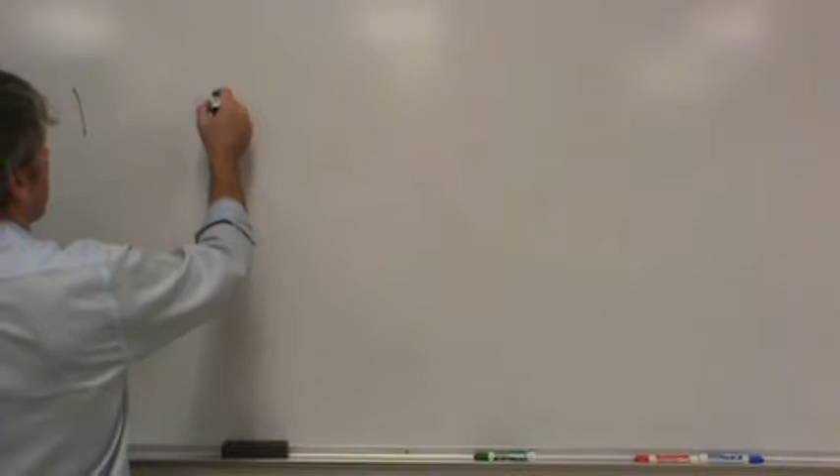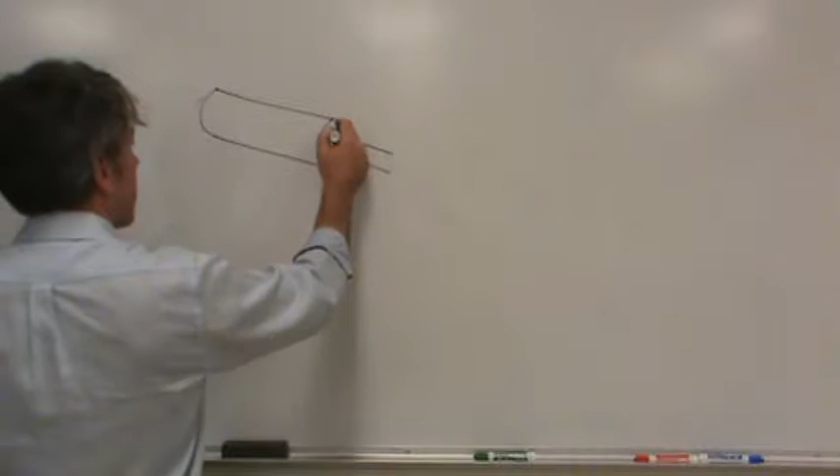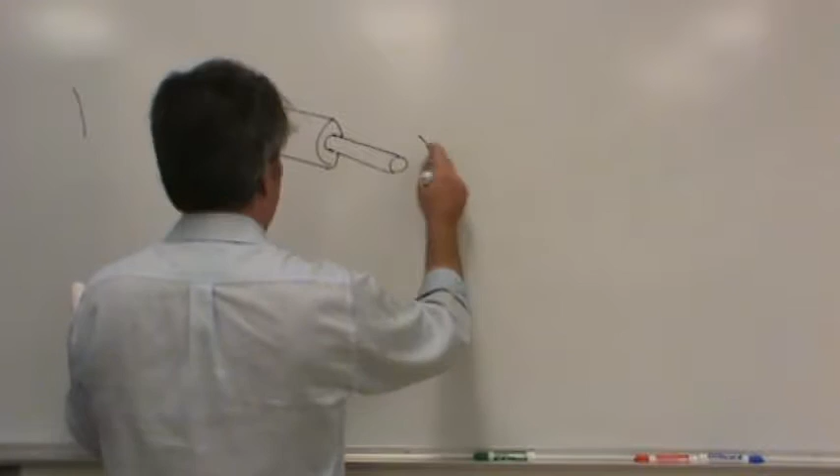Okay, so we have a bar that has a varying size. It's got a larger size on one end and a smaller size continuing. My drawing's not good, but you can see it in your book. Basically, there's a torque on the end. I'm not going to draw the disc on the end. In fact, I'm going to use a different terminology so you guys get used to it.

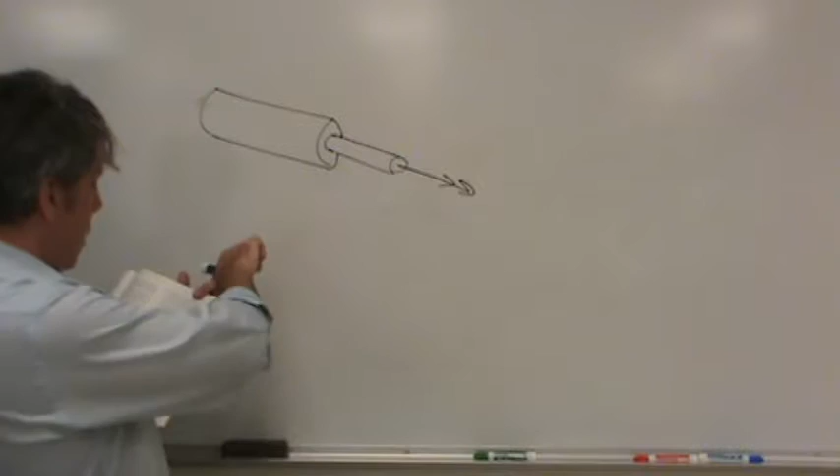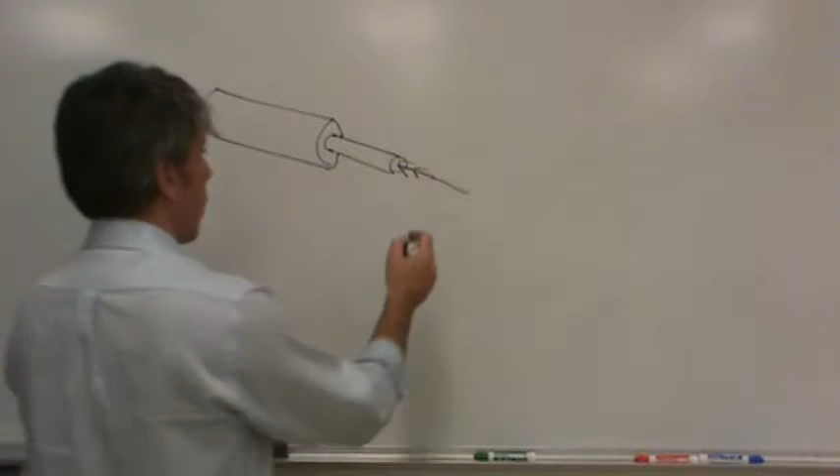So there's the torque. Have I drawn that torque in the right direction? Is it correct according to what the book has? No, because the torque in the book is this way, so I need to reverse my arrow. Doesn't really matter as far as the stress is concerned, but for consistency, I'll draw it the right way. So this torque is a 200 Newton meter torque.

And by the way, for the sake of the video, this is 4-27. So the back end of this is fixed. I won't draw the wall, I'll just put some crosshatch there to indicate that it's fixed. You got the dimensions there.

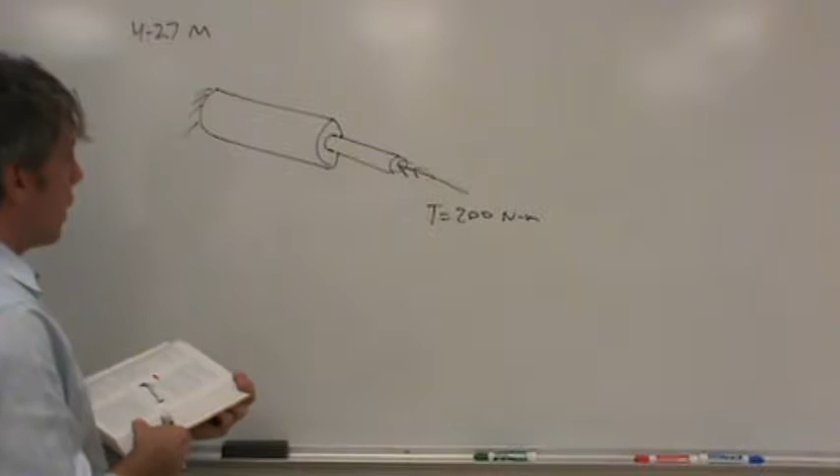Now let's think intuitively about what's going to happen here. Forget this small section for just a minute. Well, actually, let's consider the whole thing. If you were to cut the beam or the shaft here, how much torque does this section have to apply to this section to keep it from rotating?

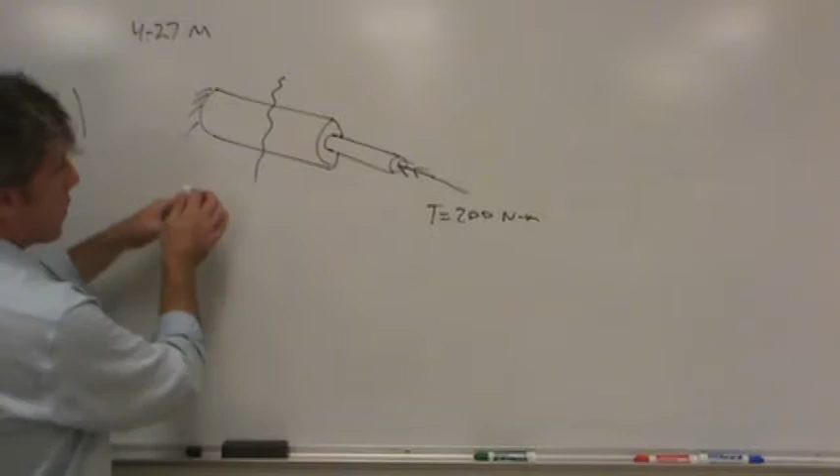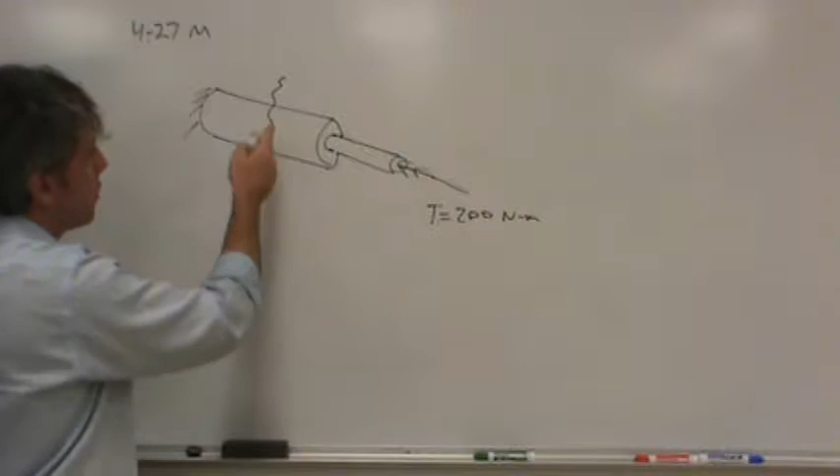200 Newton meters. It's just an equilibrium. So basically, this section of the shaft, we're applying a twist this way. It's got to twist this way with 200 Newton meters to keep the thing from rotating, right? So if we were to cut it, we'd expect to find 200 Newton meters. In fact, notice it really wouldn't matter where you cut the shaft, you'd find a torque of 200 Newton meters. Does that make sense?

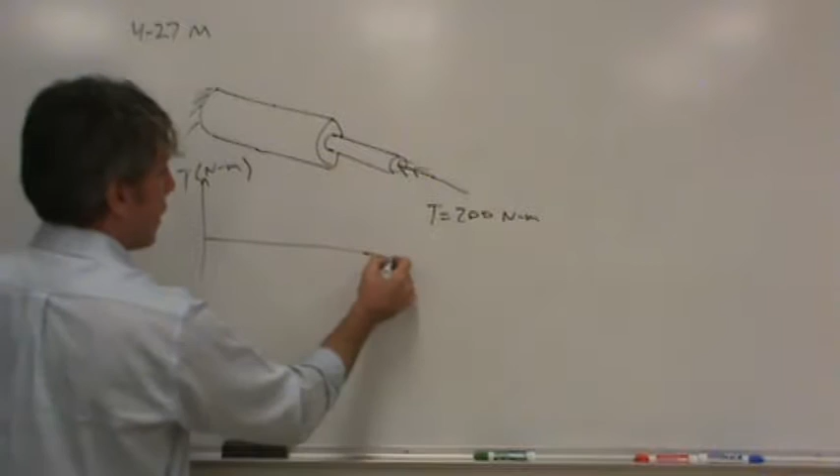So the point here is that if we were to make a torque diagram in Newton meters along the entire length of the shaft, you'd find the same level of torque until it drops off at the end. We're going to start making diagrams like this where we look at loads over the length of the beam or the shaft or whatever it happens to be. Does that make sense? Okay, so the torque is constant throughout.

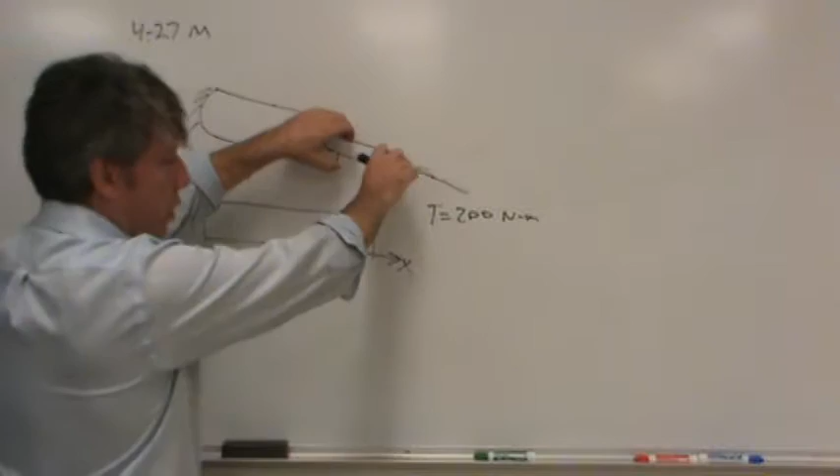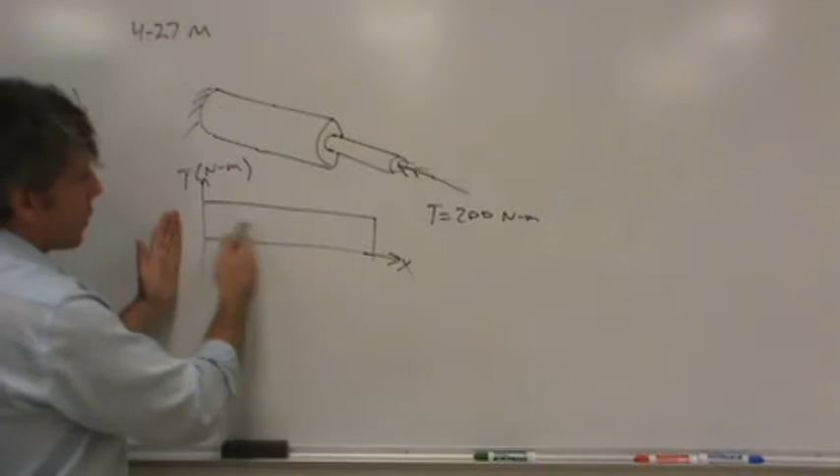Does it matter that the section that's resisting that torque changes in size? No. Would you expect intuitively for the stress to be higher in this section or this section? What do you think? Small section, right? There's less material there, it's not out as far, right? So the stress is going to have to be higher to supply the same level of torque. So we expect, if we were to make a shear stress diagram versus length, you would expect to see a step in it here, right?

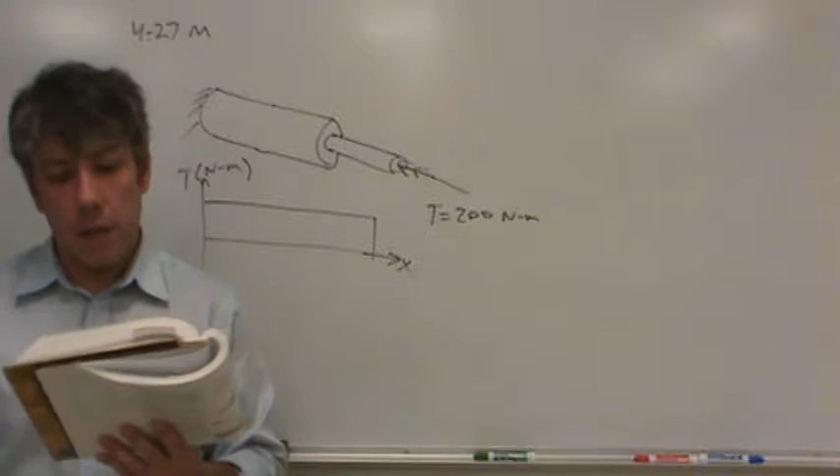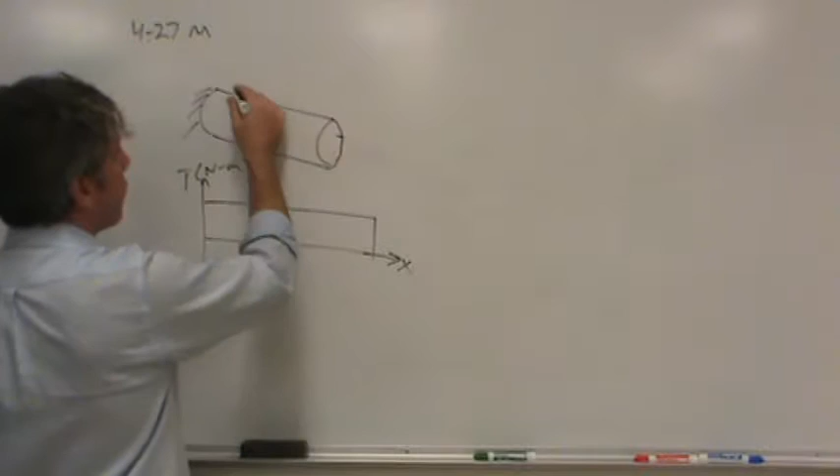Now, let's go back and see what they asked us to do. Compute the angle of twist of the free end relative to the fixed end. So we don't have to look at this from the very beginning, right? We can ignore all of this and just answer the question, what's the angle of twist out to this section? Let me call that section 1. So that's somewhere along the length, okay?

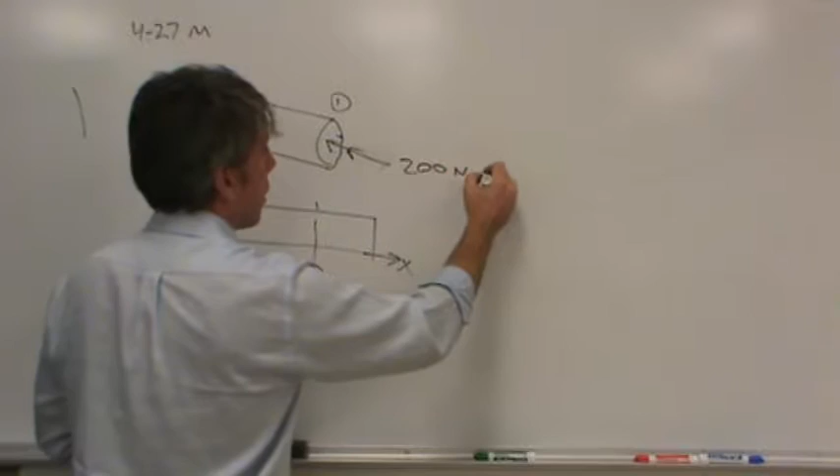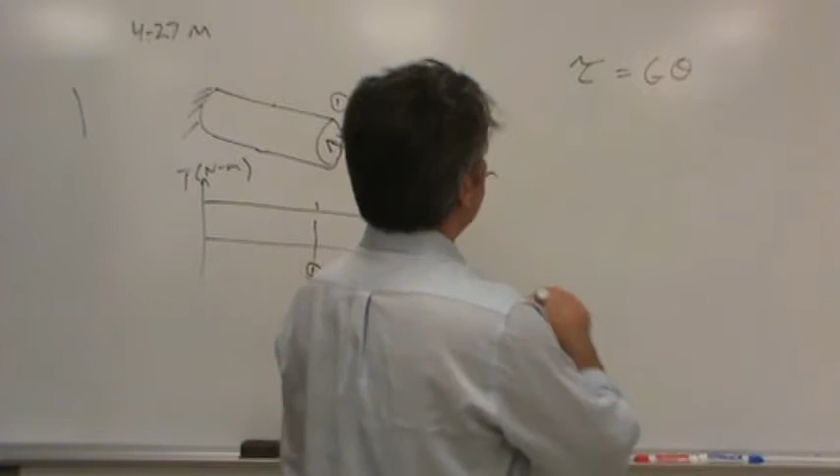So the torque is still the same, it's still 200 Newton meters. But how do we calculate the angle of twist? Well, it turns out, basically the angle of twist is given by this equation, because remember before I said that the torsional stress is just proportional to the strain, and the strain could be measured in radians. But if the torsional stress is Tc over J, then you can solve for theta, the strain, as Tc over JG, right?

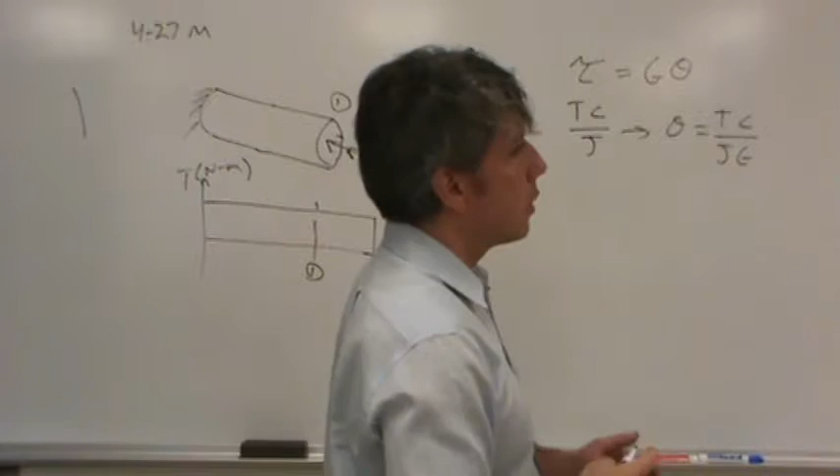Actually, I didn't do the same thing, did I? Well, what's different is that in this equation, the longer the rod, the more the angle is going to change. Does that make sense?

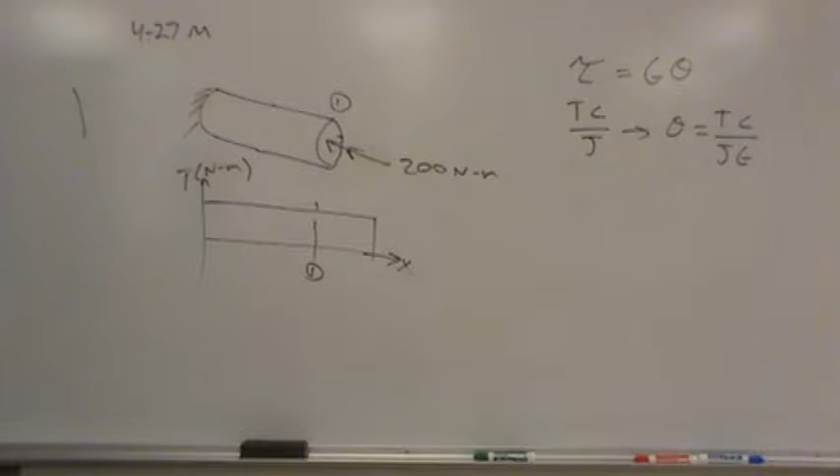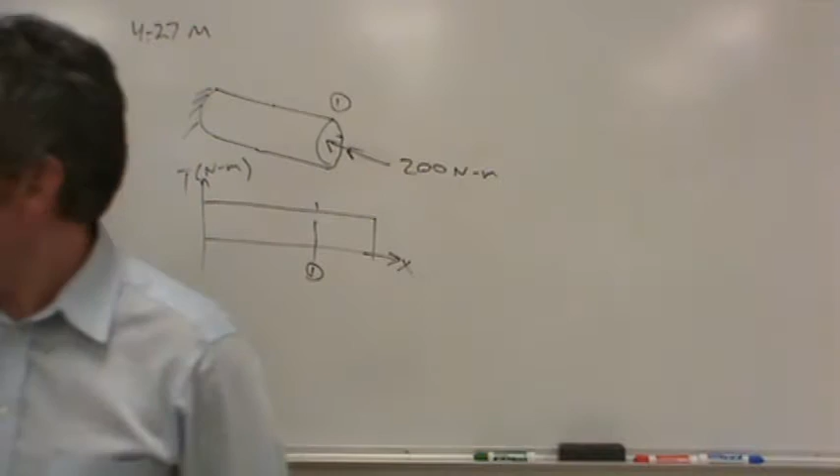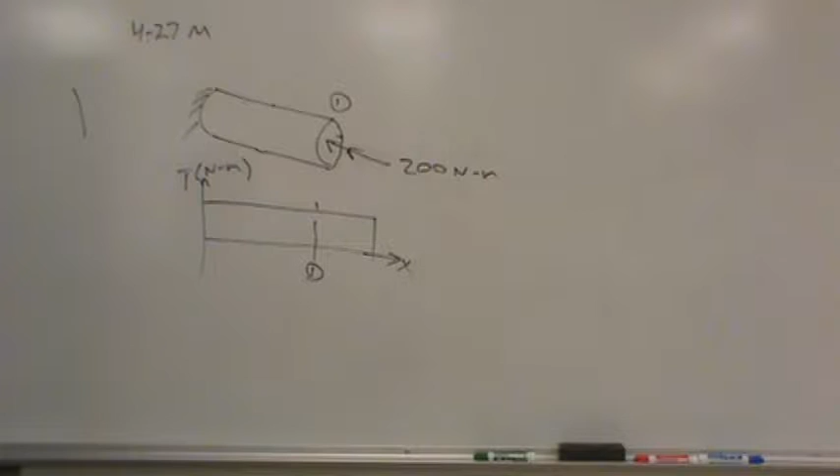So I'm missing a step in here somewhere. I should have thought about that before I wrote it. But you can see how that would work, right? The higher the torque, the more the rod should bend. The longer the length, the farther it's going to turn. The stiffer it is, the less it's going to turn - that's based on geometry. And the stiffer it is from the material, the less it's going to turn.

So that's where that comes from. So basically what we need to do is use the equation that they've got there: theta is TL over JG to solve our problem. I'm missing something, I think I'm missing something in this equation. I'll have to think about it, but I'll get back with you next time. There's something else in here that I'm missing, but I can't think of what that is right now. We'll get to that later.

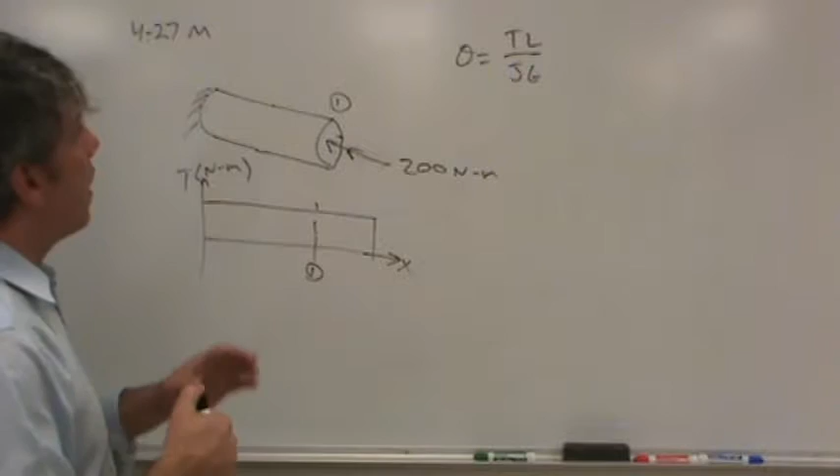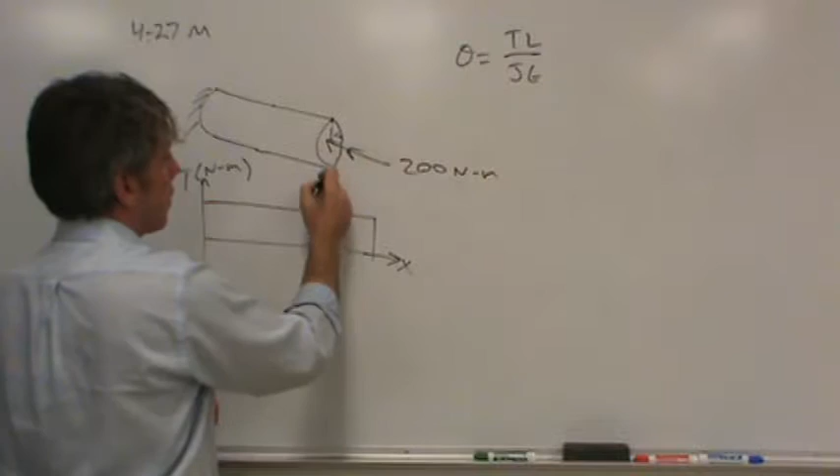So if we want the angle, if we want to know how far this is rotated - I guess it would rotate the other way, right? So if we want to know that angle, theta 1, then we can calculate it. Now what length would we plug in? Well, just this length, right? So let's see if we can calculate theta 1. It should be pretty easy.

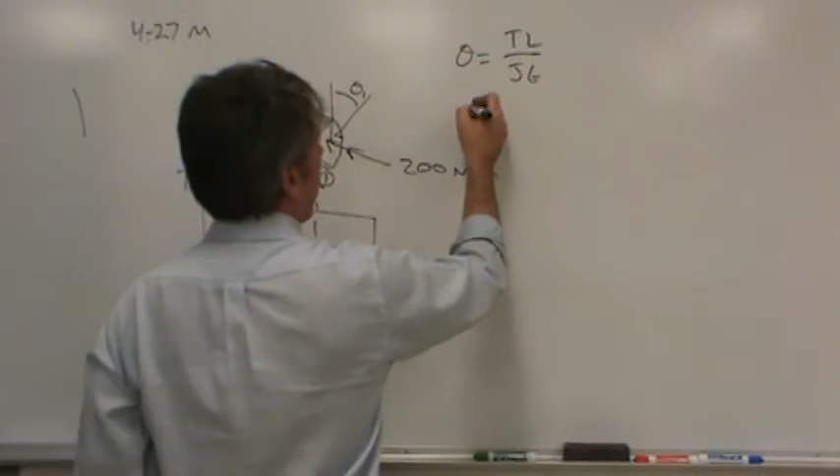It would just be the torque, 200 Newton meters, multiplied by the length. Well, what is the length from there to there? Was it 1.2 meters? Is that what they said? 1,200 millimeters? It's 1.2 meters divided by J.

Well, we need the polar moment of inertia for a circular section. Do you guys remember the equation for that? It's pi d cubed - no, that was the other one, right? Pi d to the fourth over 32. 32, there we go. Good.

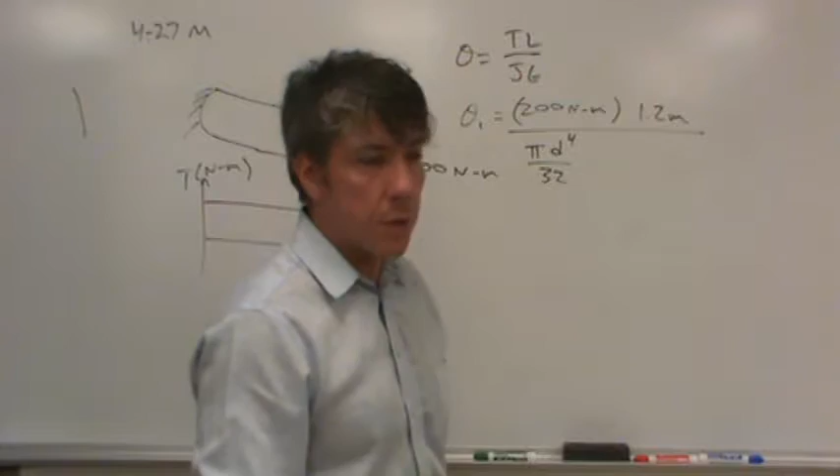And then we need G, so we need to know what material is it made out of. Now, I'm plugging in numbers, so let me go ahead. What was the diameter of this section, the larger diameter? 40 millimeters. Okay, so 0.04 meters to the fourth power. Okay, so I'm missing something.

I'm missing G. Well, what is this made out of? Let's see. Steel. It's a steel bar. Notice they didn't give us the alloy. Why didn't they give us the alloy? It doesn't matter - it's about the same no matter what alloy you've got.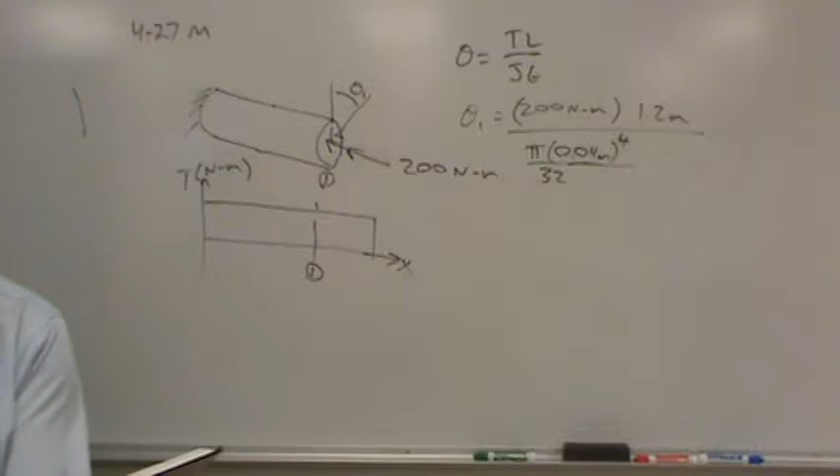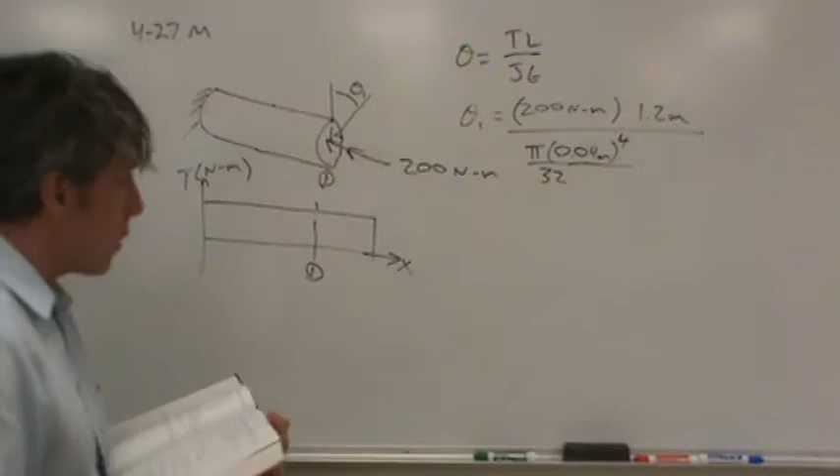Now, I should have looked this up too before I started this problem. Hey, I got lucky, here it is, page 218. Here's a page you will probably want to mark because there are several different shear moduli here for different materials. The one we need is for plain carbon and alloy steels, and we're in metric units, so it's 80 gigapascals. Okay. You guys see it on table 4-3?

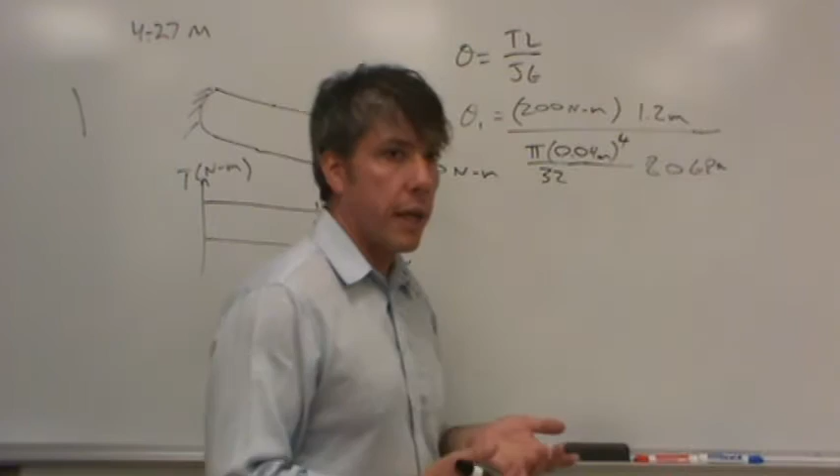So this should give us the deflection. Now, this is an angular measurement. What units will it have? Let's find out. We've got gigapascals here, but I guess the easiest way to do it is to say that it's giga newtons per meter squared, because a newton per meter squared is a pascal, right, force per area. So it's just 10 to the 9th of those.

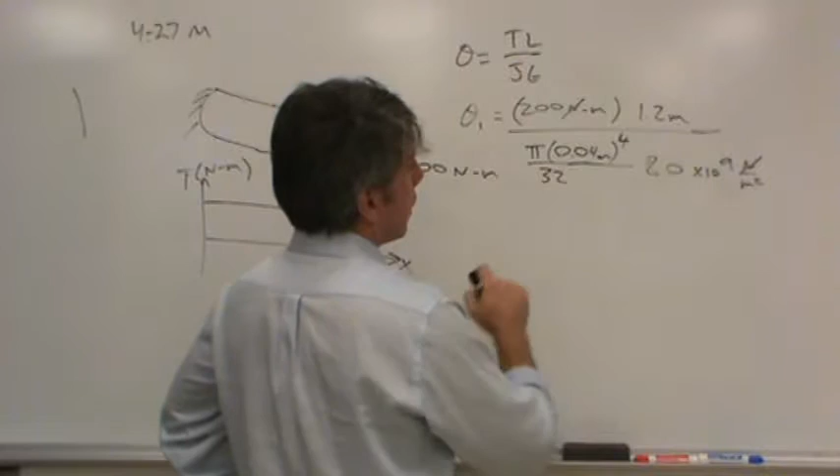So times 10 to the 9th newtons per meter squared. Well, now the newtons can go away. And let's see, this is meters to the 4th divided by meters squared. I've got a problem somewhere because it should come out dimensionless. Oh, no, here it is - meter here, so they'll cancel. Okay, yeah, so all those cancel.

Good. Let's say I did something wrong - you should always use units because I've caught myself making mistakes before by using units. But they do cancel, so I'm pretty sure this is correct. So plug it into your calculator, please: 200 times 1.2 over pi over 0.04 to the 4th power over 80 E9. You can multiply the whole thing by 32 - basically, you can take this 32 and move it up here, and you got the same thing. It's just inverting and multiplying. So this is going to be a really small number times a really big number.

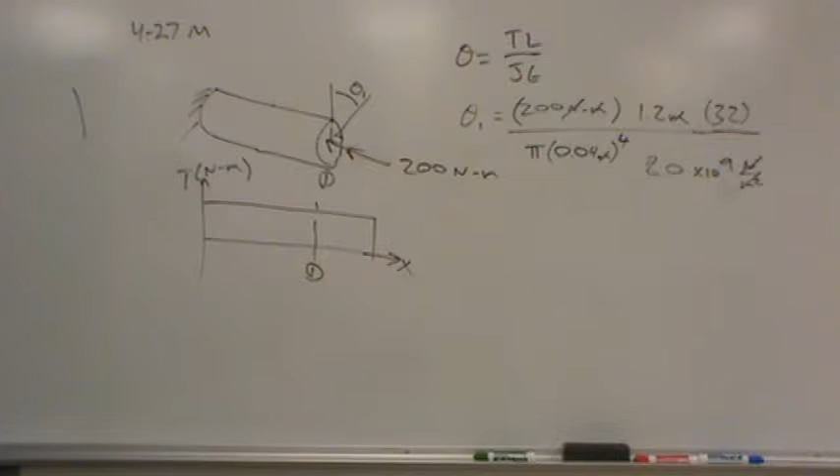So anyone have an idea? What do you have? An answer? 0.0119? Second, 0.0119, thank you for the second.

This is non-dimensional, isn't it? Well, what kind of an angle is non-dimensional? Radians, exactly. These are not degrees, these are radians. So we can simply say these are radians.

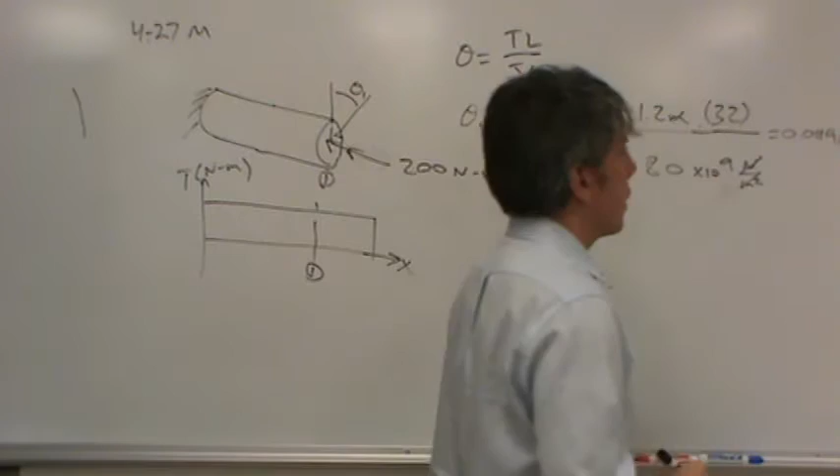Make sure I don't go off the video, so I'll just erase it. Now, how do you go from radians to degrees? Because I don't have a good feel for radians. So what do you do? Pi over 180.

Well, actually, how about 180 over pi? Oh yeah, sorry, that's all right. Degrees per radian, 180 degrees per pi radians. Well, you know the radians are gone. So what do we get when we do that?

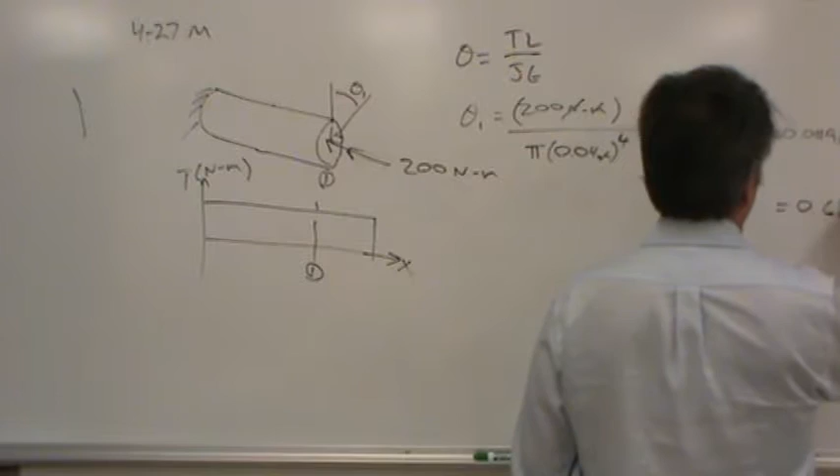How much? 0.68. So that's how far it rotates, less than a degree, a little over half a degree.

That's how far what rotates, just this section. Well, do you understand that the small section will rotate by that amount plus some because of what happens inside of that shaft? Okay, well, let's figure out how far the second section would rotate. Well, it would be another angle like this, right? It'd be essentially the same thing.

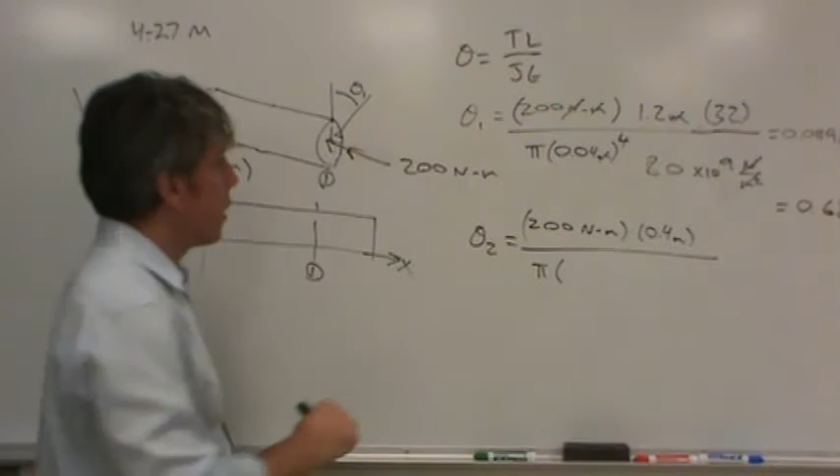It would be 200 Newton meters, because it's the same torque in that section, multiplied by the length. The length of that section was 400 millimeters, so 0.4 meters divided by, same thing, pi d in this section is 20 millimeters, so 0.02 meters to the fourth.

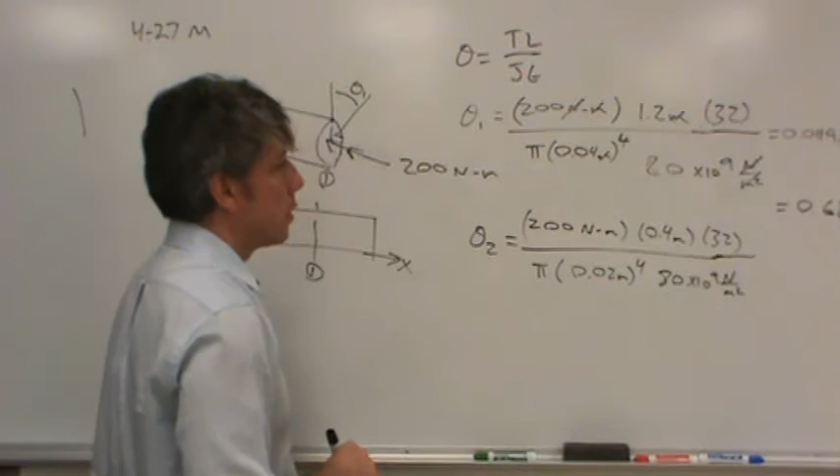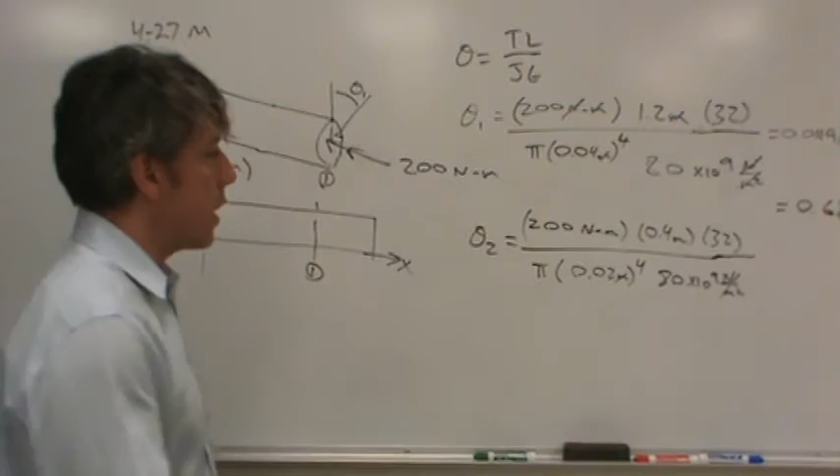Let's go ahead and put the 32 at the top, so we don't have to mess with that part. Okay, and then same 80 times 10 to the 9 pascals. Units should go away again, just like they did before. So give me an answer if you would, please. This again will be in radians.

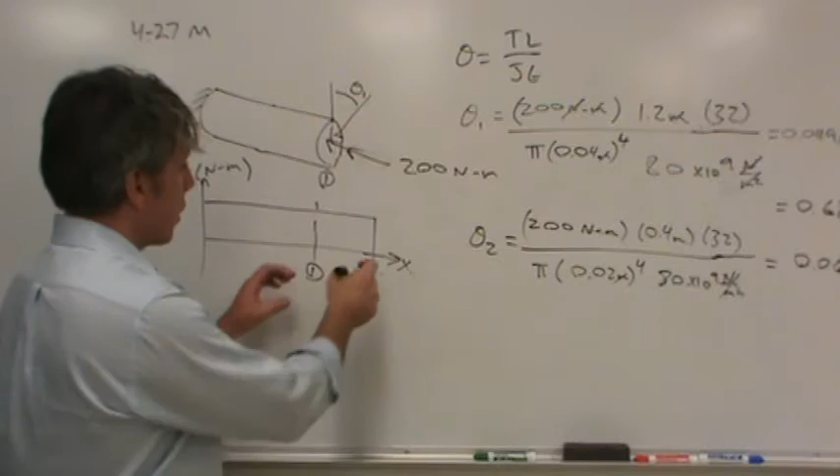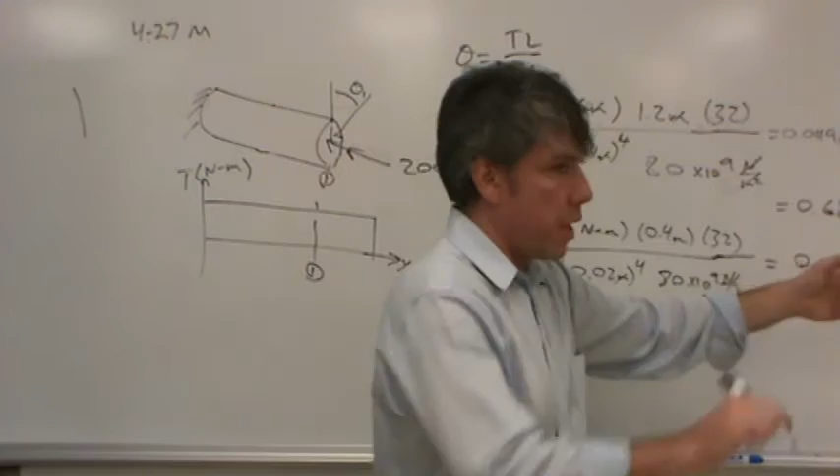0.064? Well, now, does that make sense? Well, it's really hard to say, right? Because we know that the smaller section has a smaller diameter, and so its polar moment of inertia, J, will be different, but also it has a shorter length. But what we found here is that it twists more than the bigger section did, even though the bigger section is longer.

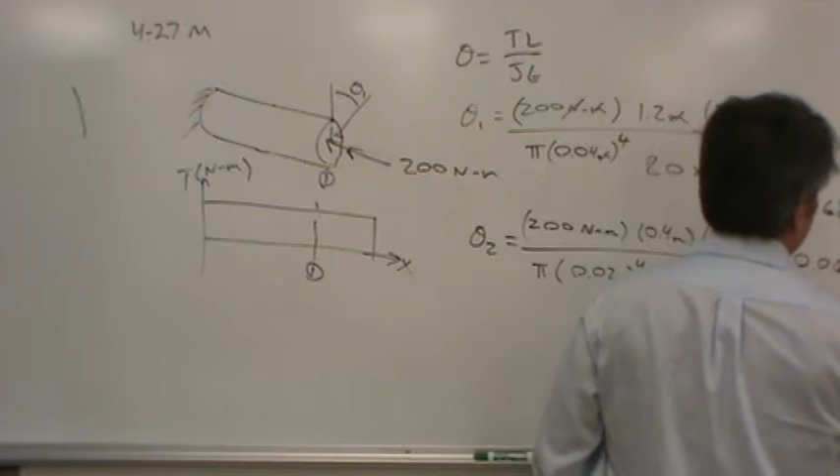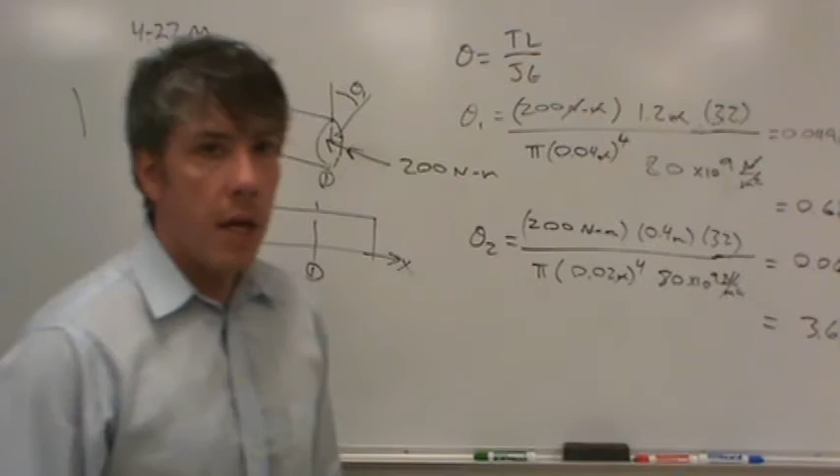Okay? So let's go ahead, since this is radians, multiply it by 180 over pi, and see how many degrees this is. 3.6? 3.6 what? 3.63, thank you. So basically the first section rotates by 0.68 degrees, the second section rotates by 3.63 degrees.

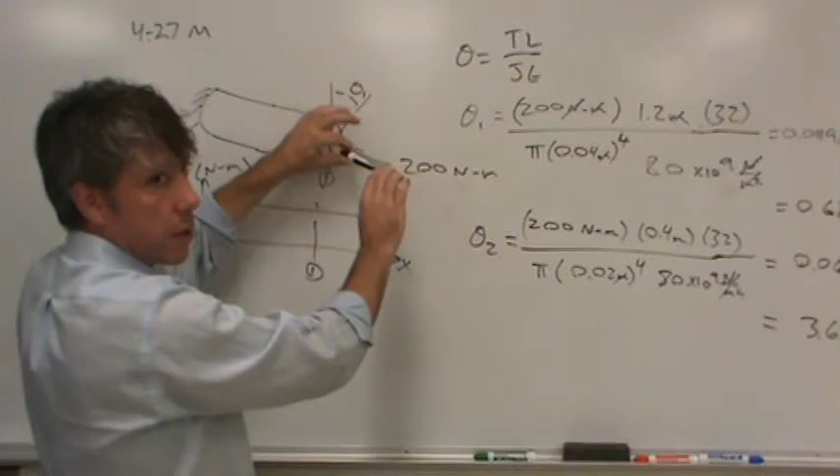How much does the whole thing rotate? The sum of the two, right? You have to add the two together, because you can think about it, if the first one twists by 0.68 degrees, all of the second one twists by that amount, plus it itself deforms, right? So this is just the extra deformation of the little section, that's all it is. Okay, so you have to add the two together to get the total.

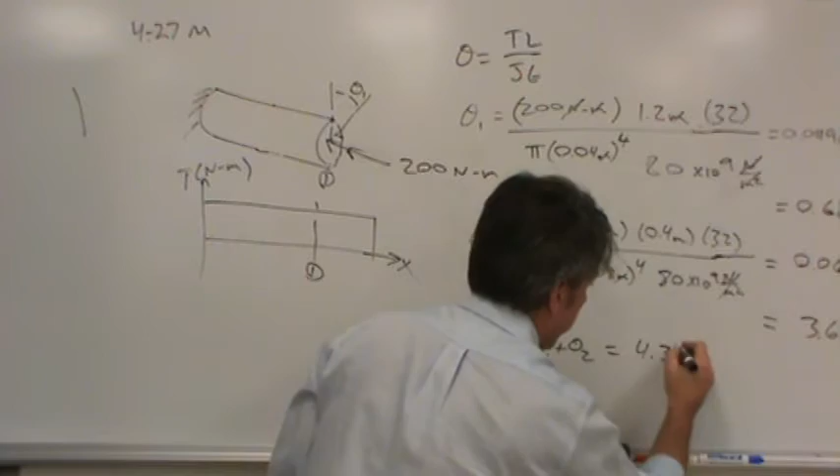And someone already told me the number, but I didn't remember. 4.3 degrees, thank you. So there's the answer they were looking for, was 4.3 degrees. Okay.

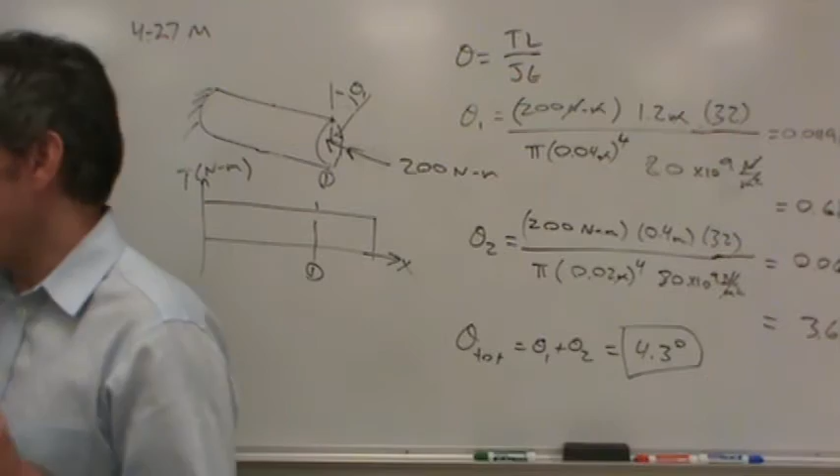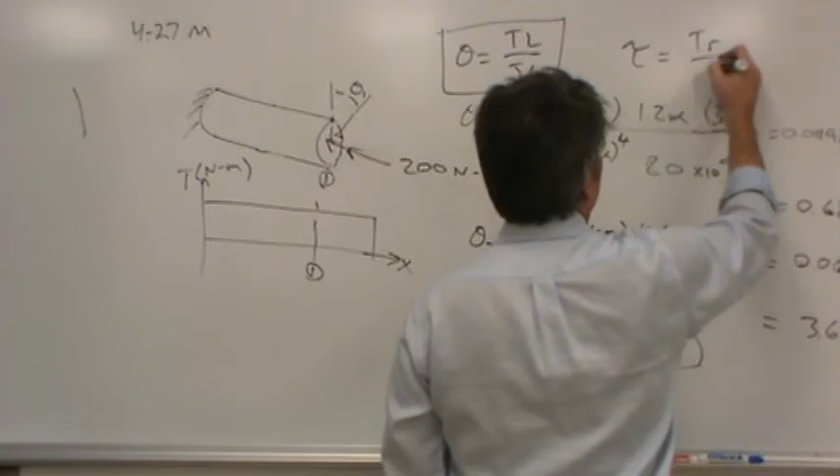Questions? Let me tell you the important parts of this chapter, okay? There's two equations from this chapter that are absolutely critical. This is one of them. The other one is this one. The stress is TR over J. Those are the main point.

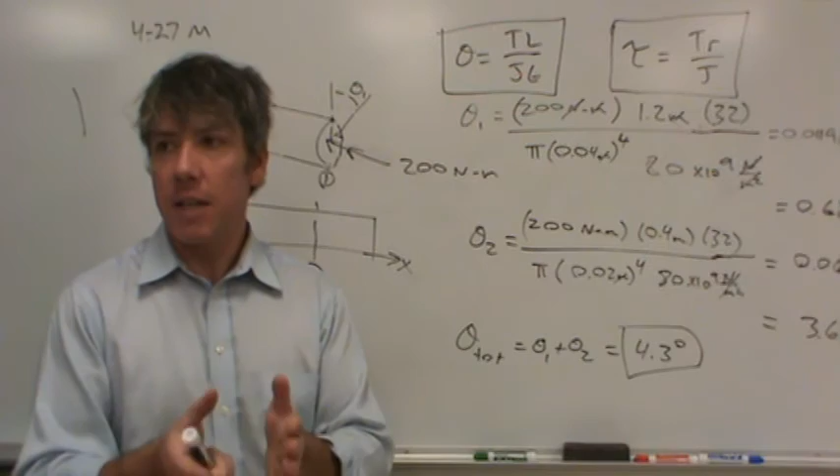You ever watch a murder mystery? You know what happens the way the writers write it? At first everyone looks innocent, then all of a sudden everybody looks guilty, right? But most of them are red herrings, things that detract from the main person who did it. Well, these are the people that did it, these are the important things. Everything else in the chapter is sort of a red herring. Does that make sense? This is what you should focus on.

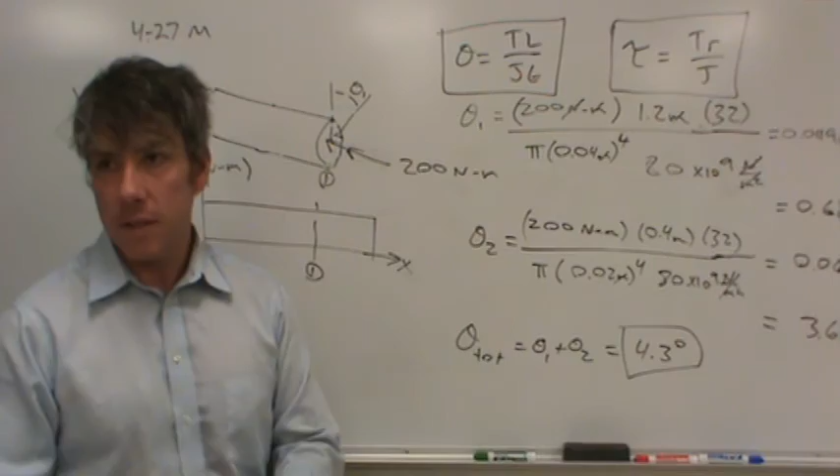Okay? Any questions? Comments? All right.